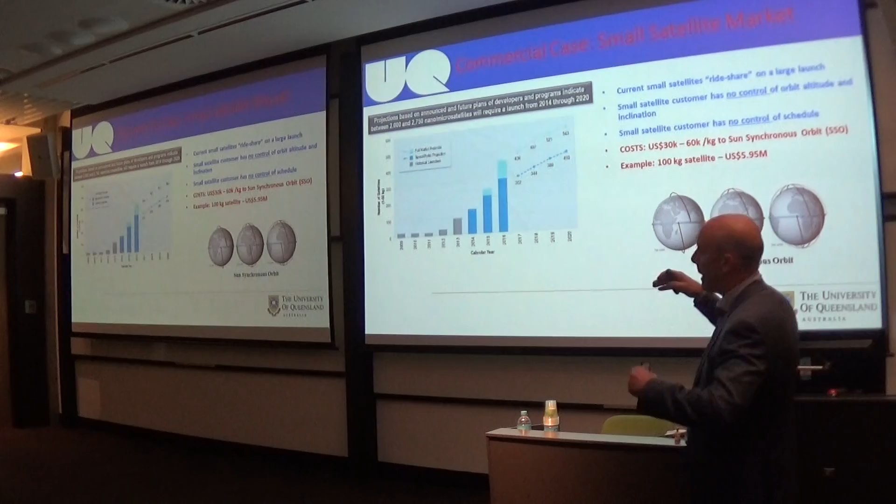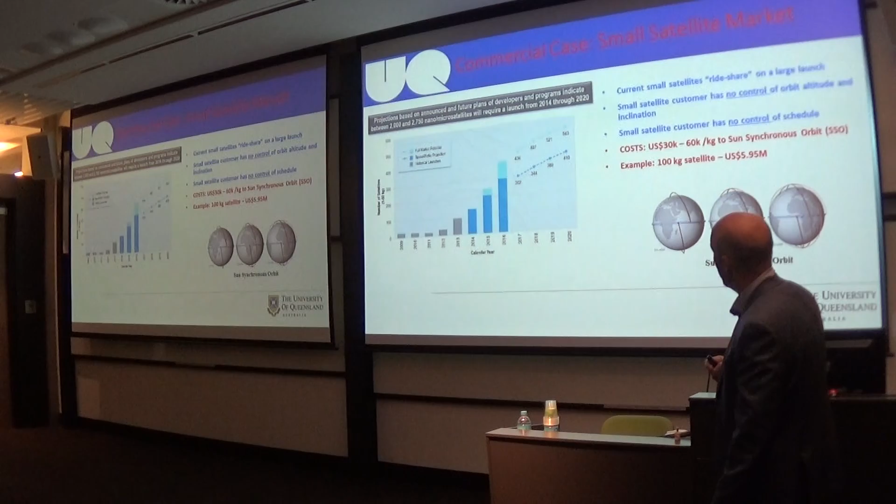So this is just some market research that's been done. It's slightly out of date now. It was done in 2014, about how many launches are there. So this is the number of launches up to 50 kilograms on the vertical axis. Horizontal axis is the year. And there are some projections towards 2020 of the order of 500 different payloads. Now, that projection is based on there not being any dedicated launch. And as we all know, these small satellites have to tag along with the bigger system. And interestingly enough, you will still pay a hell of a lot of money per kilogram to tag along with someone else's launch.

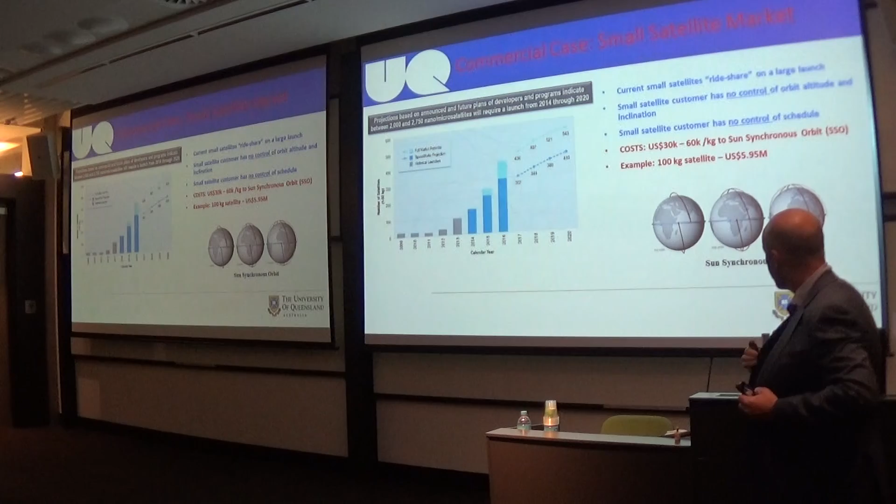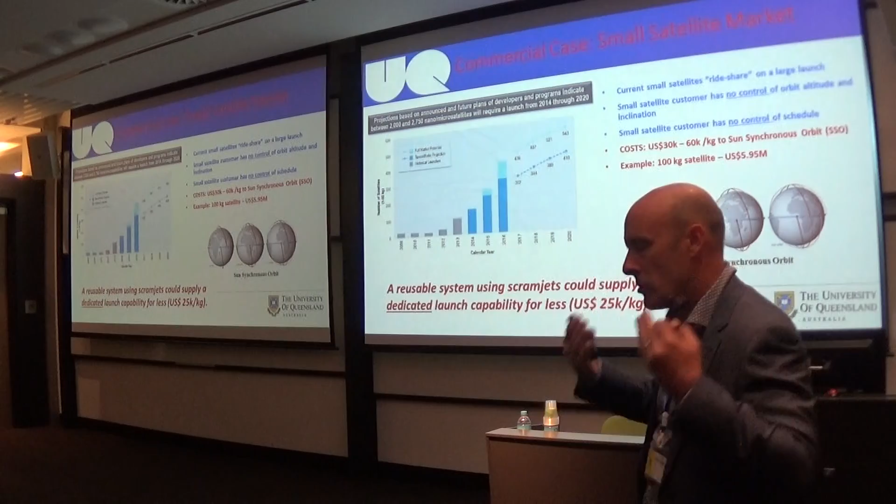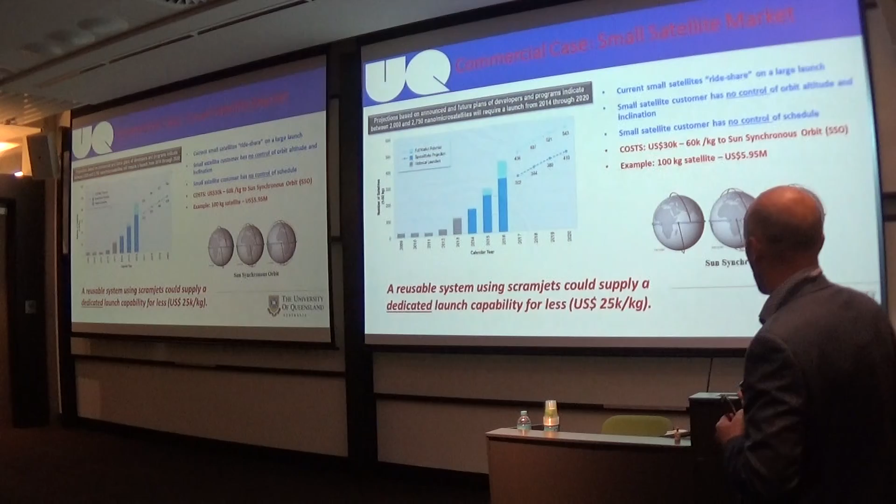So the current prices right now to sun-synchronous orbit for something of the order of 100 kilograms is $5.95 million US dollars. So that's very close to $60,000 a kilogram to sun-synchronous orbit. With our reusable system, we've done a lot of business modelling. So this is not just a university effort. This is an effort with some small Australian companies. We believe with a reusable system we can supply a dedicated launch for the order of $25,000 per kilogram US. So less than half that sort of price.

So this is the type of system that I'm talking about. It's actually a three-stage system, just like any other rocket launch system. The first stage is a rocket booster. A scramjet's main limitation, and the reason that you don't see scramjets flying around right now, is that they don't generate any thrust until you get to Mach 5. Okay, so from takeoff to Mach 5, a scramjet is no use to you. So you need a first stage to get you up there. And our plan is to have a reusable first stage, using the ideas that Elon Musk and SpaceX have put forward, but doing it in a much simpler way, using aircraft technology. Our solution is not a rocket solution, our solution is an aircraft-based solution. And I'll show you a bit more detail on that.

So that's the first stage. The second stage is our scramjet vehicle. Hypersonic vehicle goes from Mach 5 to Mach 10, totally reusable. And then we have a very small upper stage which is expendable. And if you do the mass budget on this thing, 90% of our mass is reusable. So 90% of our system comes back to land essentially beside the launch pad, not downrange in the ocean, but right beside the launch pad. So this is the idea.

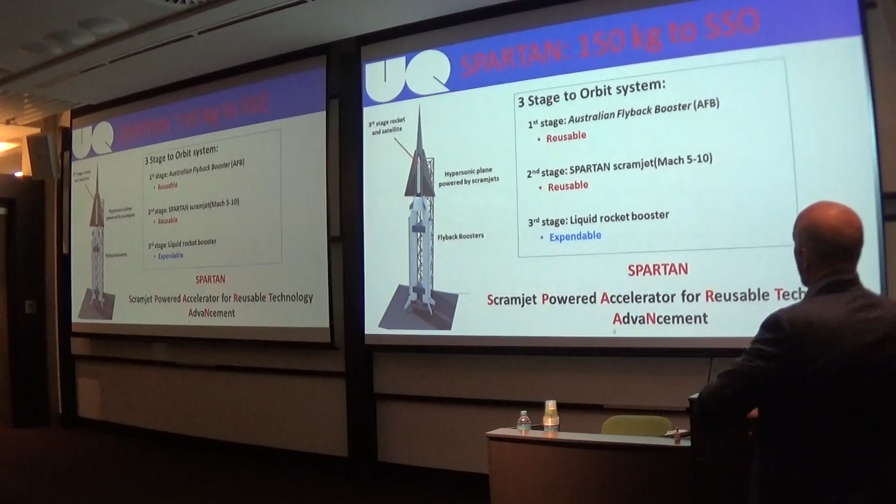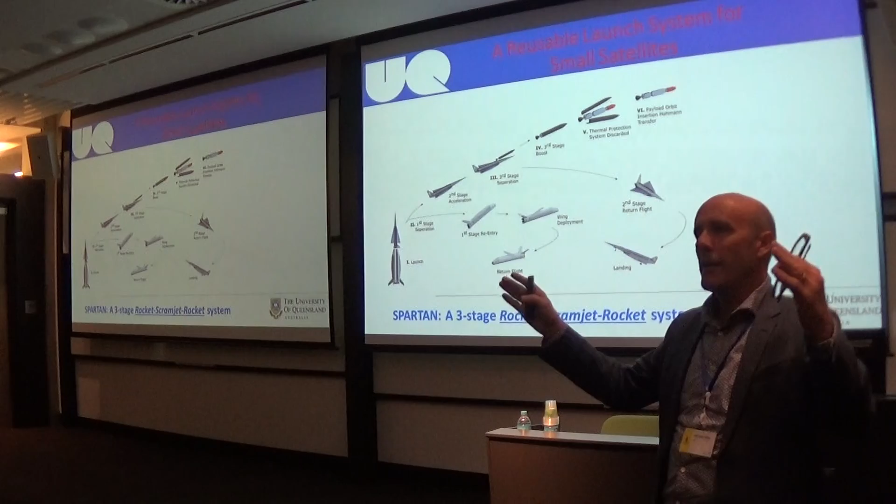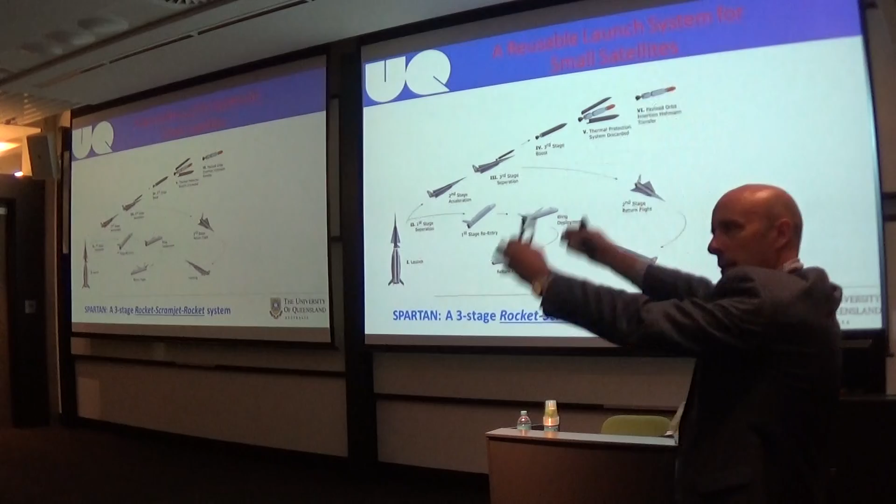And the other thing about this system is it's quite small. It's not a SpaceX level system. I don't know if anyone's been to Los Angeles, but Elon Musk has one of his reusable boosters in his car park. Have you seen that? Absolutely amazing. But the thing is massive. It's like 50 meters high and 5 meters in diameter. That thing that you see landing on all those videos, it looks like a video game. That is absolutely massive.

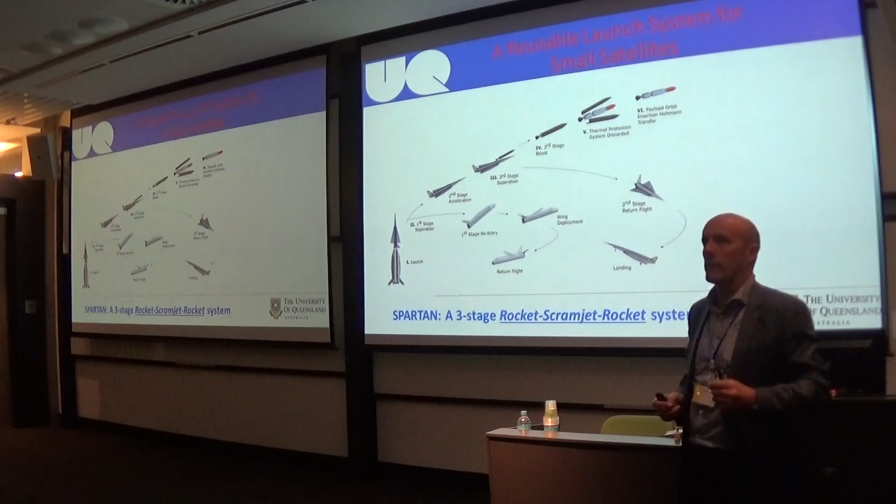This is not what we're talking about here in Australia. We're talking about a small system, half the size of a 737. So it's a tiny system. And this is how it would work. It's vertical launch. The rocket boosters get the scramjet up to the takeover speed. They then separate, re-enter, and deploy wings and a propeller.

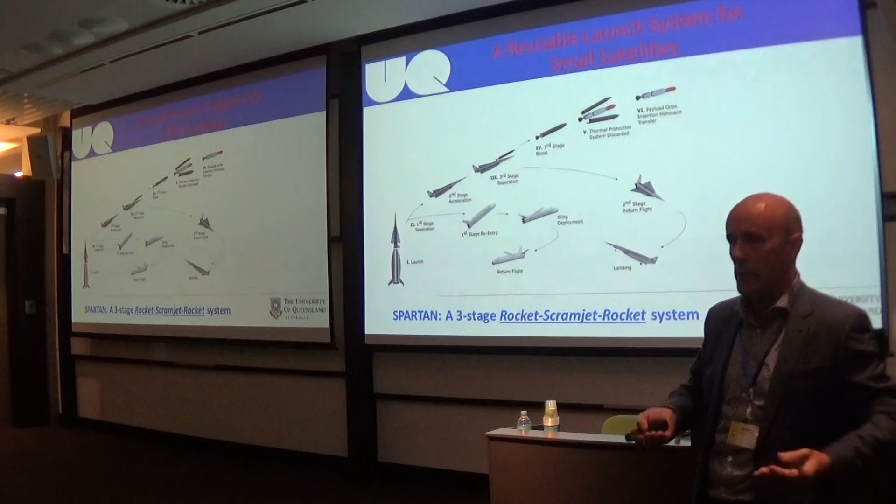And it all seems very exotic and perhaps complex, but the thing about a rocket booster is once it's expended its propellant, it's actually a big cigar case. It's very, very light. It doesn't need a lot of lift or a lot of propulsion to bring it back to base. So it's an aero solution to this problem of reusing rockets, whereas the SpaceX solution is a rocket-based solution. The second stage then accelerates onwards and upwards up to Mach 10.

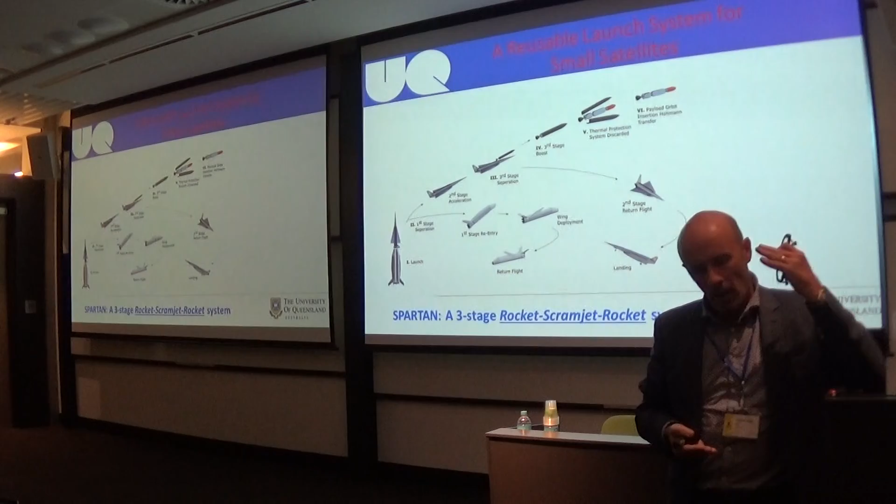That vehicle needs to be made out of high-temperature composite materials, which we've done a serious amount of work on here and in Germany over the last couple of years. Once the scramjet vehicle has finished its job, it can then fly back to base as well. So all those things come back to base. They can be refueled and used the following week. And then the upper stage goes up to sun synchronous and releases the satellite. So that's the system.

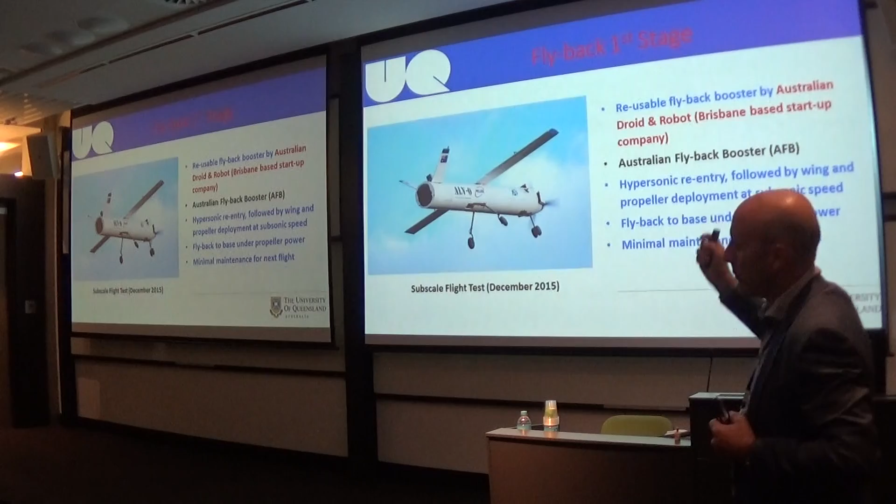It's following on from the ideas of SpaceX about reusing, but in a much more practical and I think commercial way. We're bringing things all the way back to base, and we're using aerodynamics to do it. Okay, so just a few details. We actually have flown a scale version of that flyback booster. We did that in 2015.

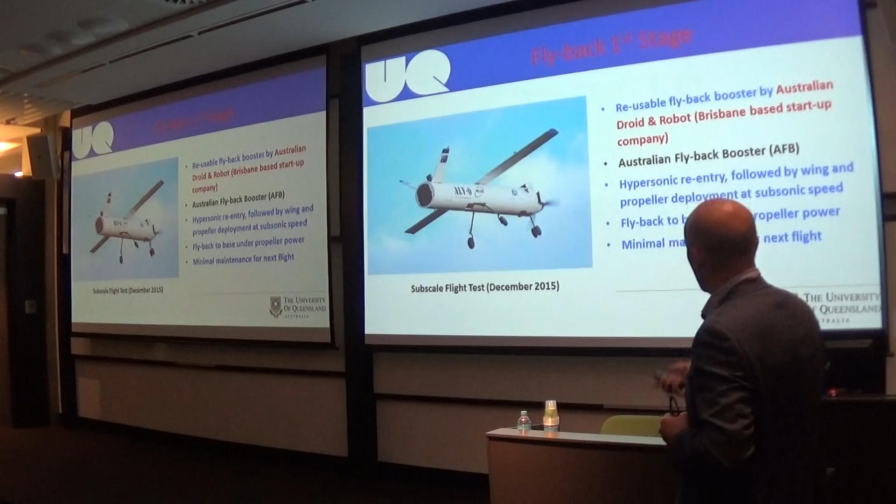It's a pretty ugly aircraft from an aircraft perspective, but it's basically a big can, and it's very restrictive on how big a wing you can put on. It's a very ugly aircraft, but it actually flies quite nicely and can be controlled, no problem. We've been working with a small startup company on this. This is not a university thing. This is a UAV company. We went to them and they got really excited, and they've done a really lovely job on the subscale version of this. There's obviously a lot of work still to do, but it was just great to see that it could actually fly.

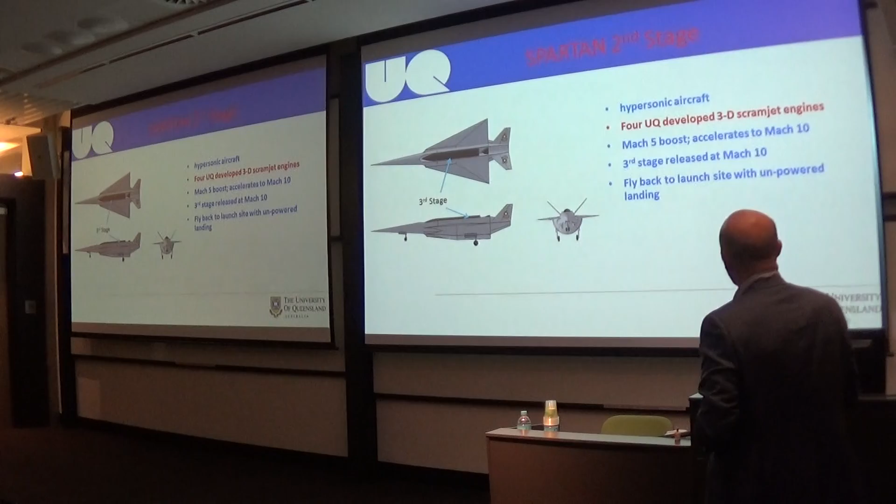The UQ part, the hypersonic scramjet vehicle, has 4 scramjet engines on it. As I say, this vehicle is way, way smaller than the 737 that I came down from Brisbane this morning on. Needs the boost to Mach 5. And once it's done its job, it's a high L/D vehicle, so it can just turn around and come back to land. Right, so fully reusable. And we're following on from these ideas that SpaceX have pioneered, but we're using our world-leading knowledge in scramjets to find our place in this new burgeoning market for small satellites.

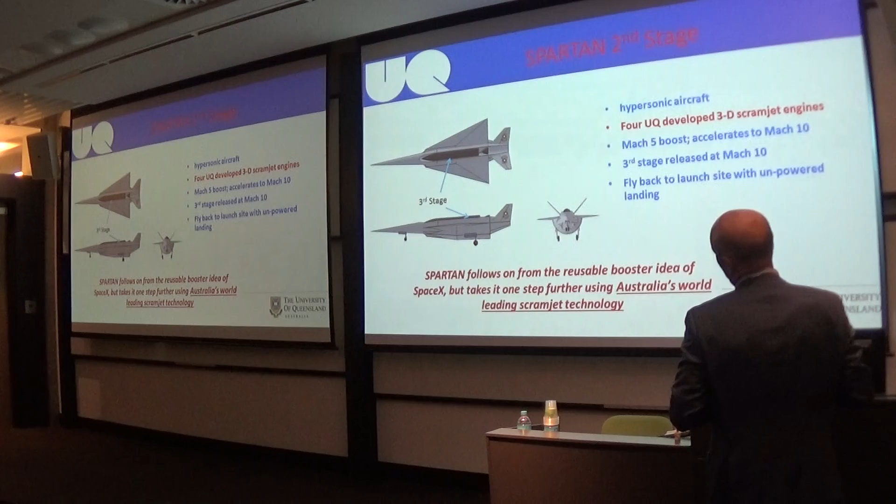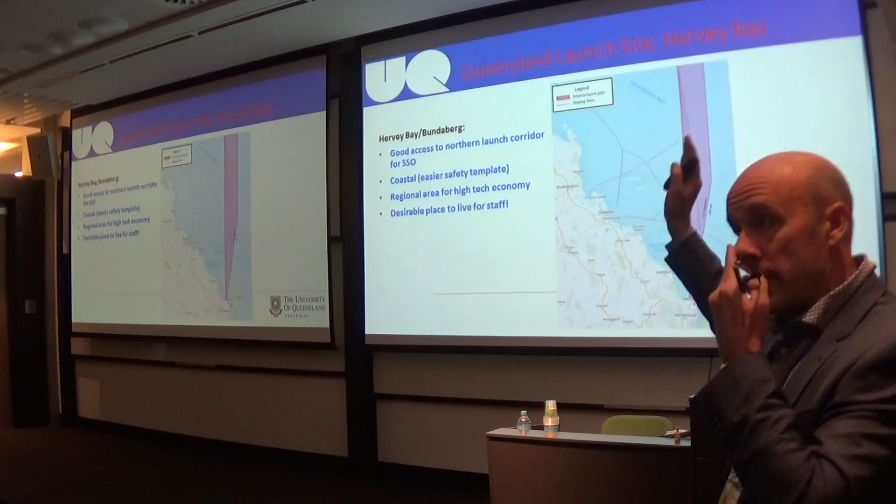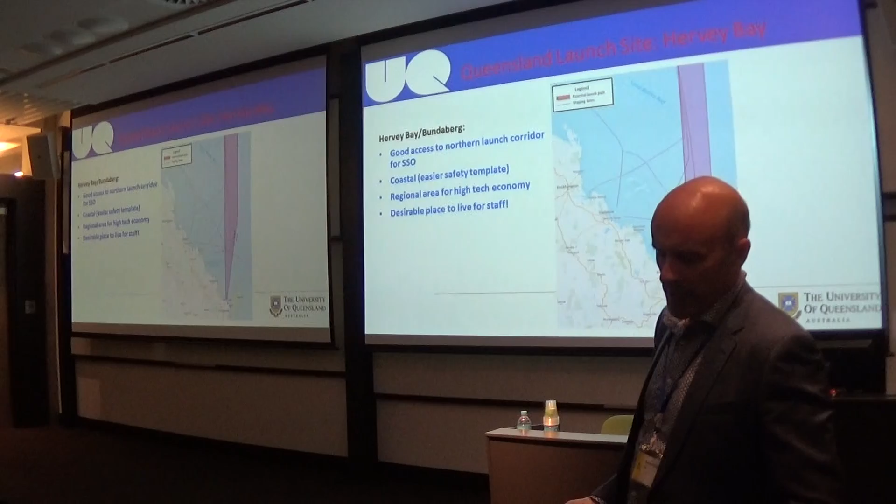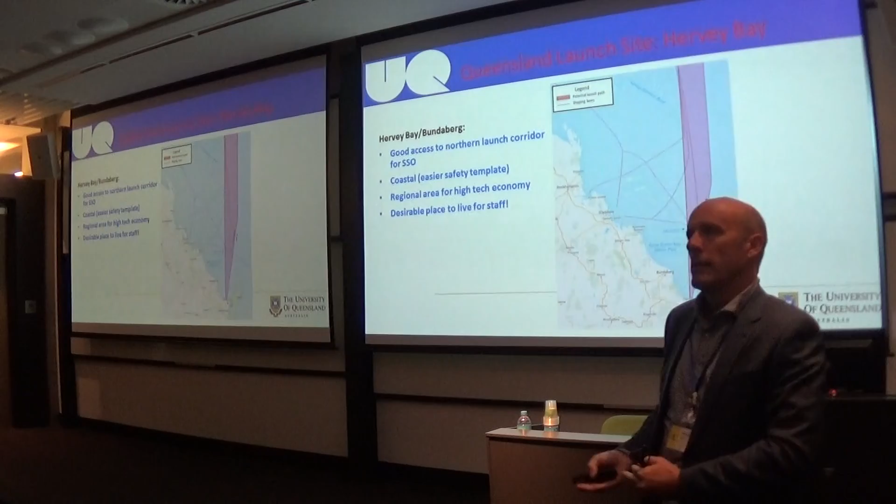Okay, so where will we launch from? We're at University of Queensland. You can actually launch north to sun synchronous orbit or polar orbit from the Queensland coast. You could also do it from South Australia south as well. But the key thing is, from a business development perspective, we want to be in a place where people want to live, but it needs to be in a regional area as well. So it's a good combination of things there. That's just one possibility, a place called Hervey Bay, which is actually a very popular place for whale watching. So you can watch whales during the afternoon, then you can go and watch a space launch in the evening.

So who else is in this market, right? When we talk to investors, we have to be clear about this. There are actually two serious players in this market. There are a lot of other people that talk about it, but there's Virgin Orbit, which is now a spin-off from Virgin Galactic, and there's Rocket Lab in New Zealand.

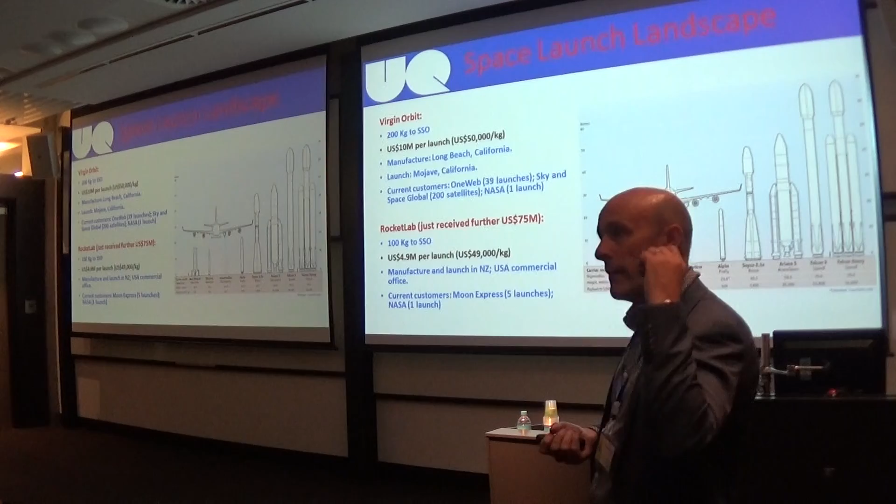So here is the Electron, which is the Rocket Lab rocket, and the Virgin group are actually doing an air launch. So they're actually going to operate a 747, which has to have pilots on it. Then they're going to do a rocket launch, and then they're going to throw away the rocket. I wouldn't invest in that. They're going to lose money hand over fist. They do have a lot of people signed up to them.

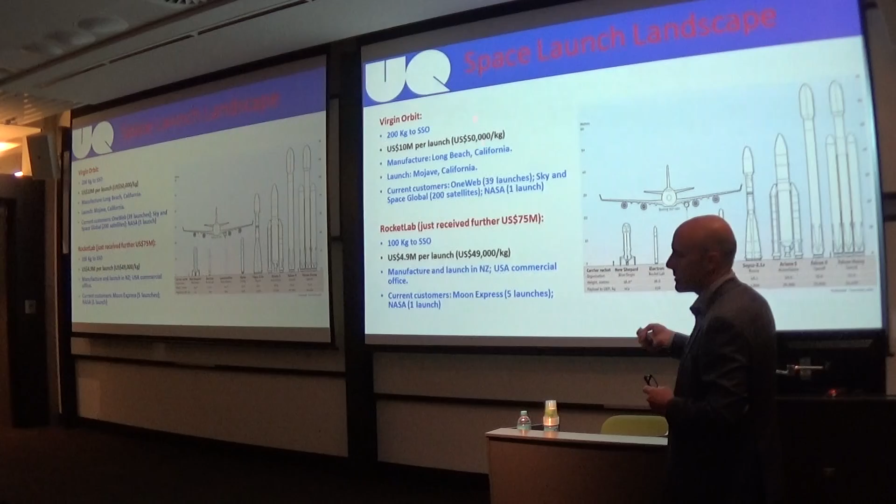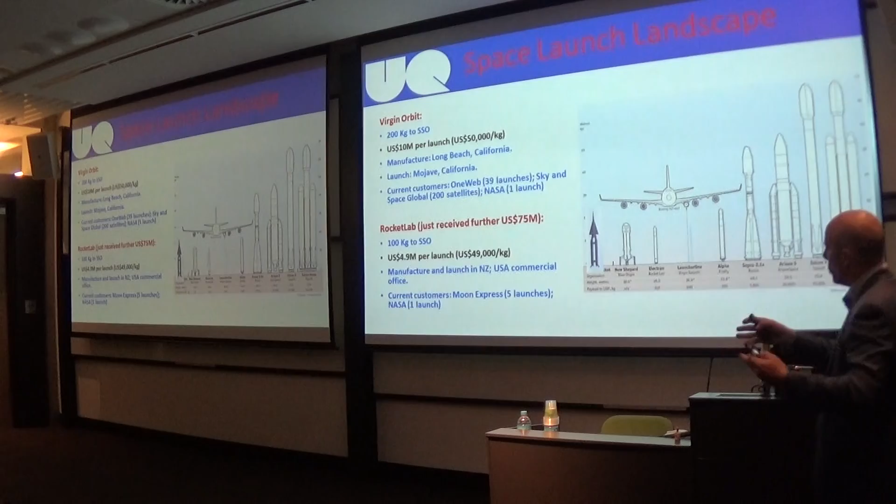Rocket Lab have a more standard system. It's just a standard rocket launch, small scale. They don't have too many customers that they've listed on their site, but it's very interesting to look at the prices here. These are basically the same prices as an undedicated launch that's available right now. Now our system is about that scale. Because it's sort of an aero-based system, it's actually slightly bigger than the smaller rockets. But as I say, the whole system's reusable.

So we have a team together right now where we're taking this technology out of the university. The university is not the place to develop technology, it's a place to do science and research. And so we're in the process of taking this outside the university with some private companies. We're working also with a group in Germany with the composite materials. UQ is still supplying this core scramjet technology.

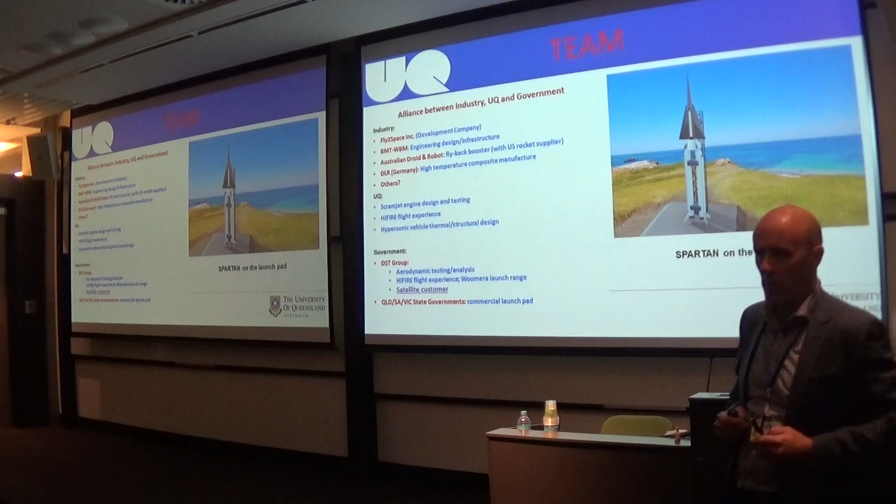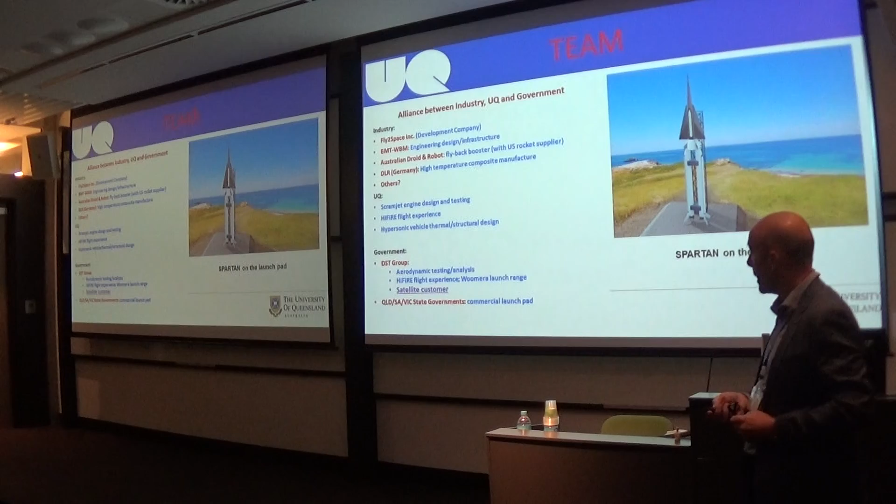And then we're also working with government. We're a part of the HIFiRE program, which is a scramjet launch program. And we're talking to governments as well about how this would be done. So we're putting a bit of a team together. We have been over the last 5 years.

And so the takeaway from this is that there's no reason why Australia could not have its own indigenous launch capability. We have some key technologies and niche areas that can be applied to this. And it's really just a matter of having a go at it. And so this audience is perhaps the customers that could use this facility. So I'm very interested in hearing your thoughts on what a system like this could do in the future. So thanks very much.

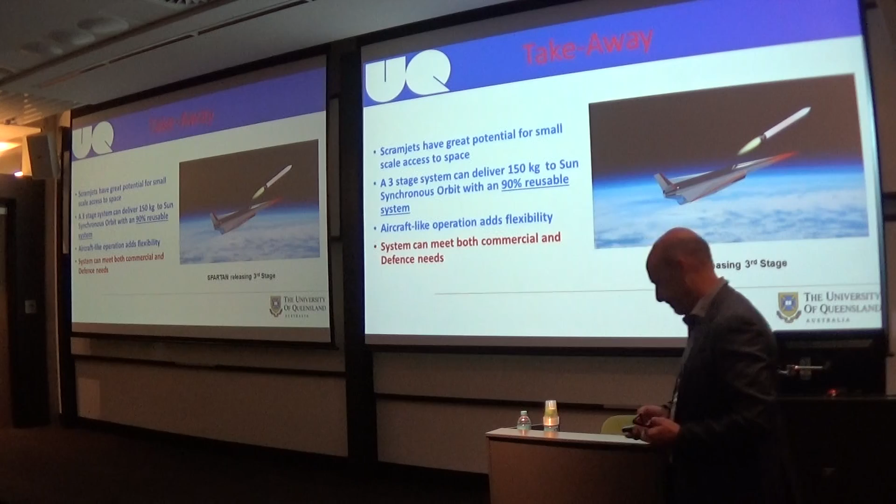Thank you very much. Any questions? I'll start with the back.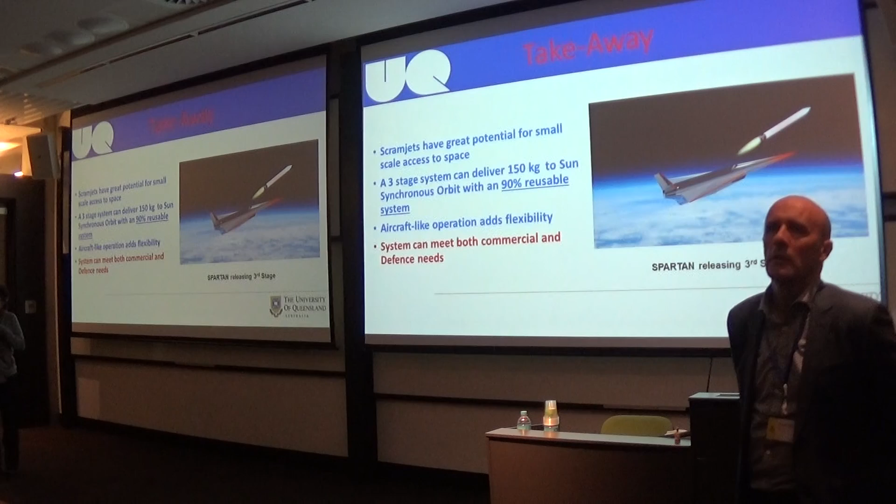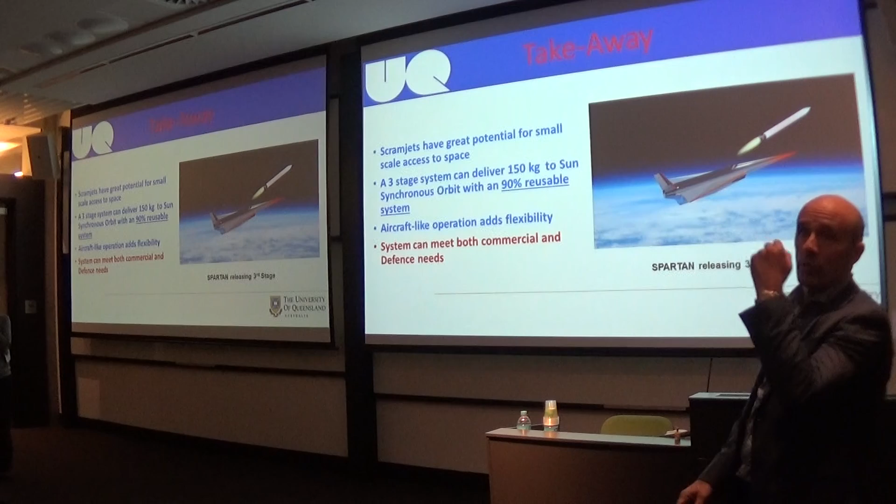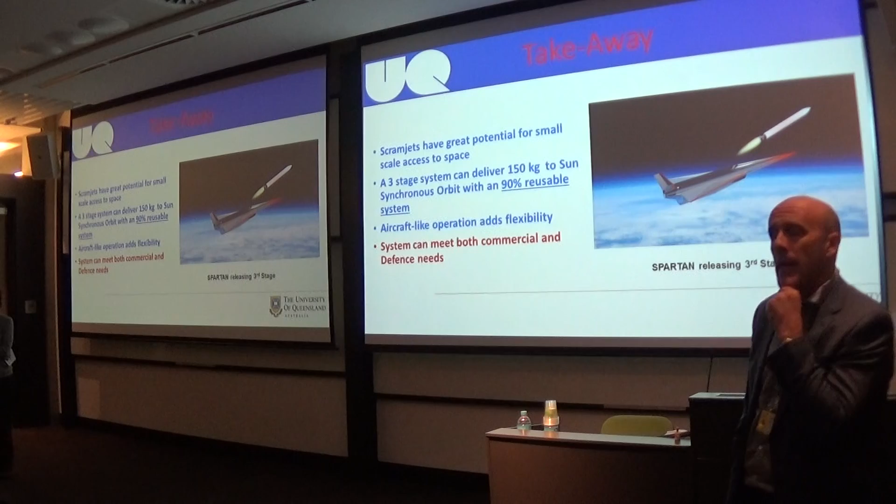Michael, I was just wondering about the aerodynamic stability of the whole launch stack. At first, the centre of gravity is going to be way down. It's going to be a very difficult vehicle to control. Are you in the vertical phase? Yes, so it's all controlled by a thrust vector control system, just like a very typical rocket. There's more lift in this system. There's some aero work that needs to be done, but with modern control software, we're expecting that it can be managed.

Well, the question was, when do you think it might be available? You do have some competitors out there. We do. Well, we're talking to the investment community at the moment. We're also talking to government about getting behind it. Our competitors are ahead of us, but the key differentiation for us is reusability.

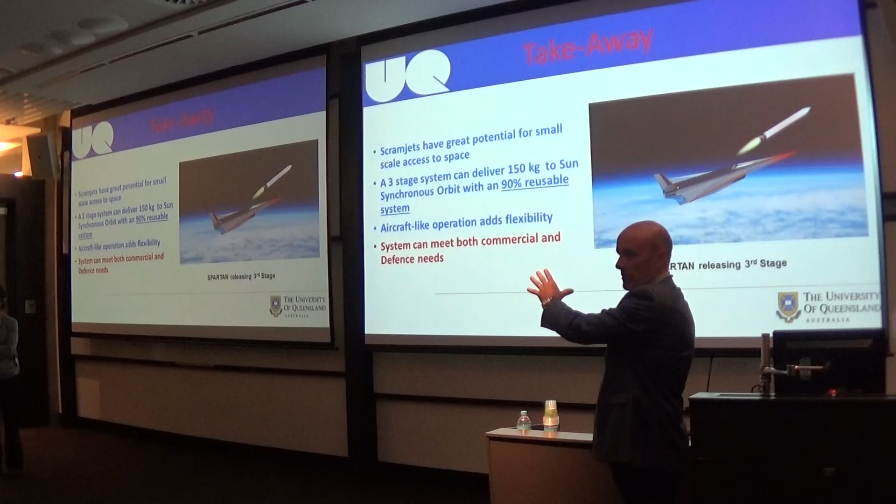They're basically using pretty standard technology, shrinking it down, and they're going to launch a rocket and throw it away for $6 million. I think you're going to struggle to make money doing that. I think the only way to make money in the small launch market is going to be reusable, and there are many other ways you could go reusable. But this is the way that uses some core technology we have in Australia, which is the scramjet, which no one else has. So that's the rationale behind it.

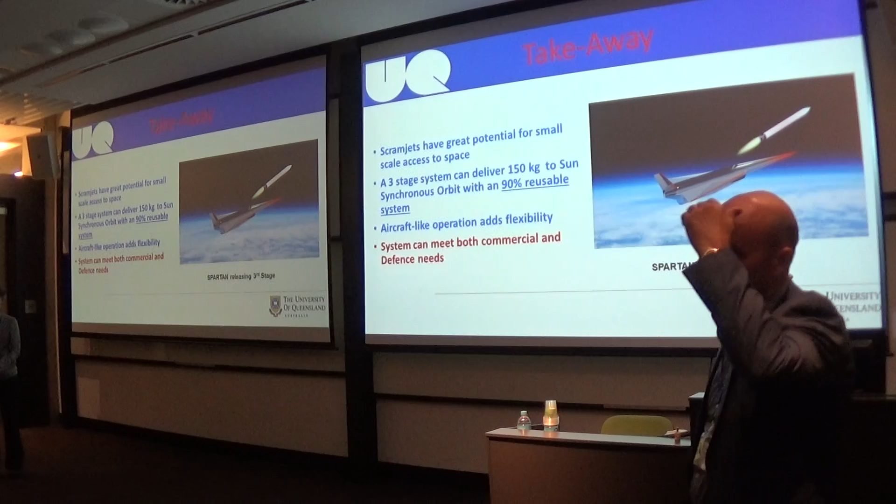So you asked me how long? We've done some planning. We think if we started now commercially, 7 years from now we could be doing commercial launches. And if anyone wants to talk to me about that possibility, we do have some business cases behind that as well. This is not just a university project anymore.

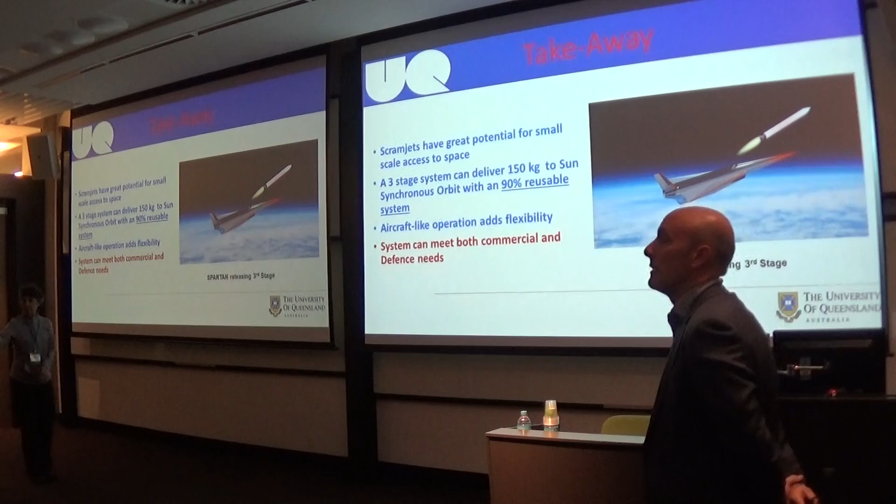How many times are you going to reuse the first and second stages? 10 times, or a minimum of 10 times. The interesting thing about the scramjet is, if you can use it 10 times, you can probably use it 20 times, because the failure mode is not really fatigue. If you can design something to last 10 times, you can probably do it for 20 as well. But all our business modelling is based on reusing 10 times.

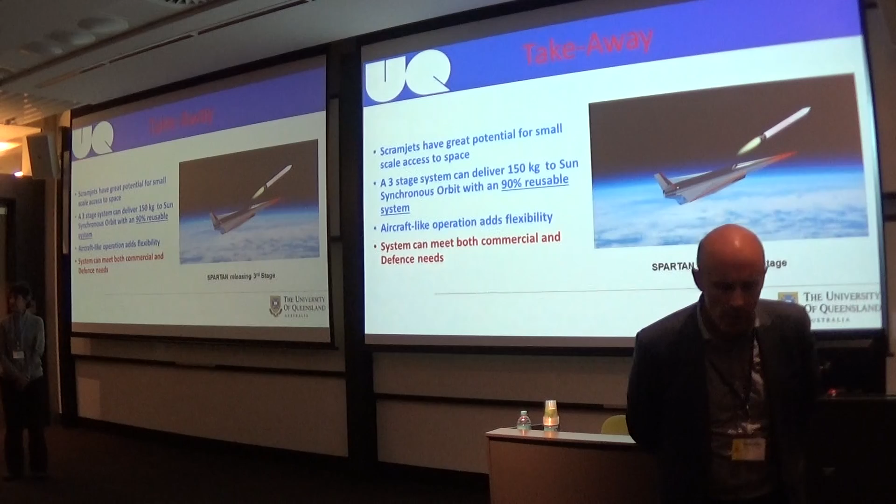So, final quick question at the back. What is the advantage of using a scramjet in the second stage as opposed to a flyback rocket? And does that advantage outweigh the risk of using a less proven technology? So the advantage is that it can fly all the way back to base with no propulsion. A rocket-based second stage would have to have... well, you could do something like what...

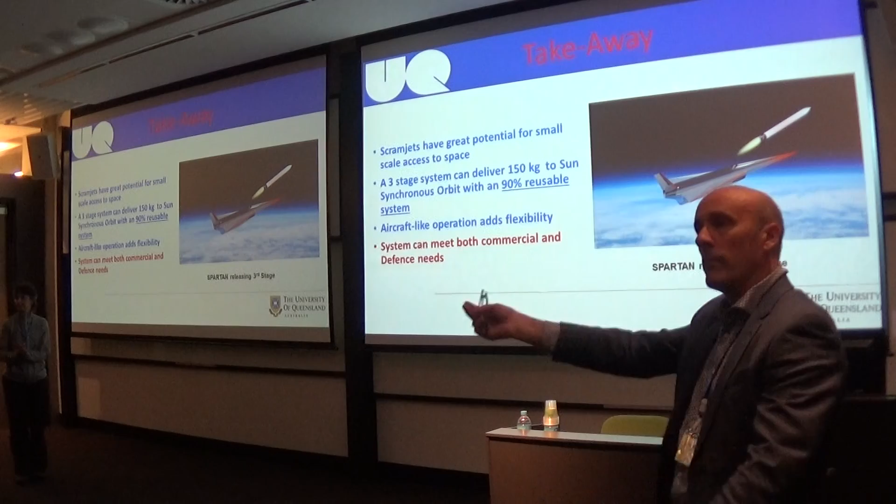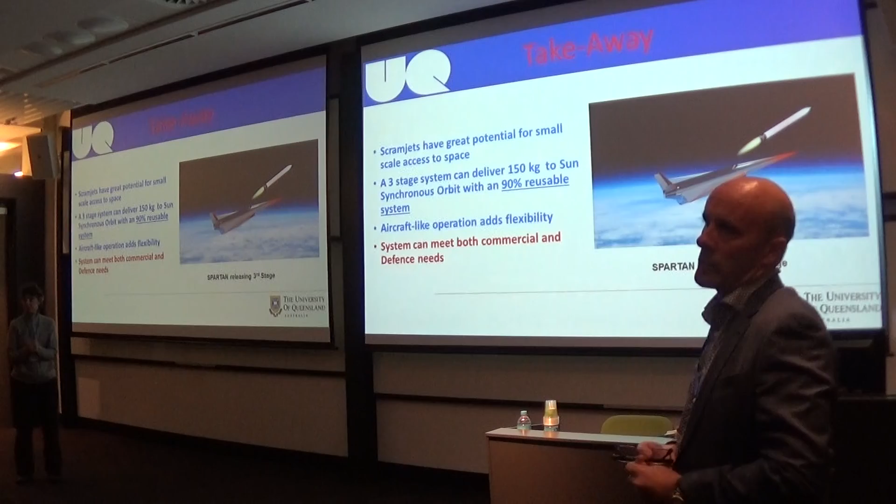SpaceX are not reusing their second stage, right? They're reusing their first stage. But you could try to do something like that as well. You'd have to have an extra thermal protection system and all sorts of other things. You also have to have propulsion coming back. The advantage of this is it's a high lift-to-drag vehicle and it can actually glide all the way back with no propulsion.